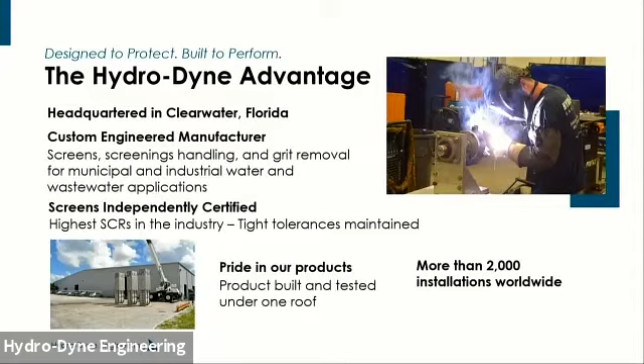First, who are we? We're Hydro-Dyne Engineering, headquartered in Clearwater, Florida. We're a custom engineered manufacturer of screens, screenings handling, and grit removal equipment for water and wastewater applications, and we've done municipal and industrial applications as well. Our screens are independently certified, and we have the highest screening capture ratios in the industry because we design and fabricate with very tight tolerances. We take a lot of pride in our products. Our products are built and tested under one roof, and we have more than 2,000 installations worldwide, so we have a large installed base.

A little summary of our presentation today. I've tuned this to maybe someone newer to the industry, but I wanted to talk about the Headworks first—it's a tough environment, a tough neighborhood. Then I wanted to transition to Headworks equipment and talk about best practices. Specifically, we're going to go into pickling and passivation and what that means. Then we'll talk about some material handling, cover some case studies, and then have a Q&A session.

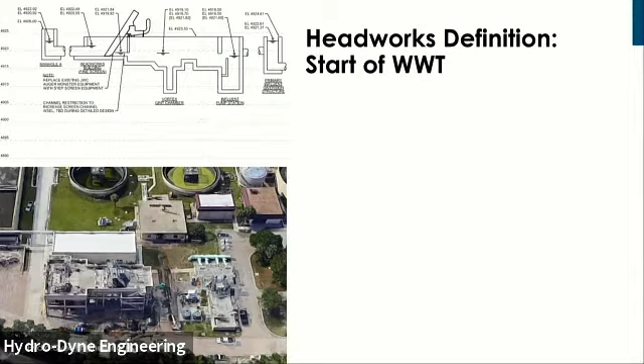So let's get started. The Headworks—it's the head, the start of the treatment process for wastewater. What does that mean? Typically, it's a concrete structure that's at the highest point of the system, and the Headworks contains the first unit processes: screens, screenings handling, or grit removal equipment. The purpose of the screens is to remove inorganic solids.

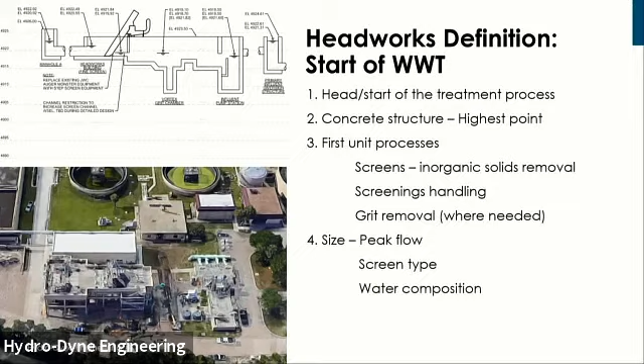The size of the Headworks is variable and depends on peak flow, screen types, and water compositions. I wanted to show a few pictures with this. The top picture shows a Headworks that is not elevated—you can see the screen there with a grit removal section and then a pumping section. Many Headworks are elevated; here's one at the bottom, very large, rated to about 20 MGD. In this case, the pumps lift water to a higher elevation to flow through the treatment process.

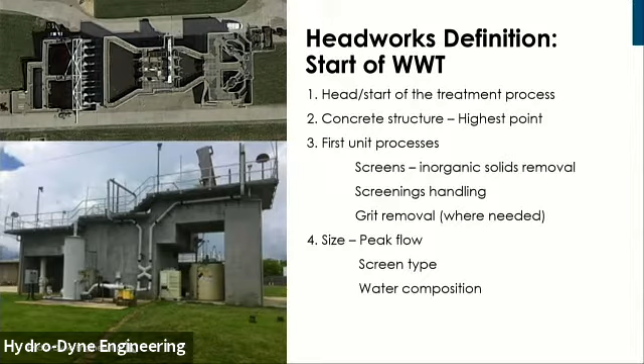Let's show you a couple more. The bottom picture here is a 1 MGD Headworks, a much smaller system, with the same design philosophy of screens and grit removal equipment, but elevated. The top picture is a larger system still, rated to somewhere around 40 MGD as peak, with very large equipment—large pumps, large screens, larger grit removal equipment—as needed to process those types of flows.

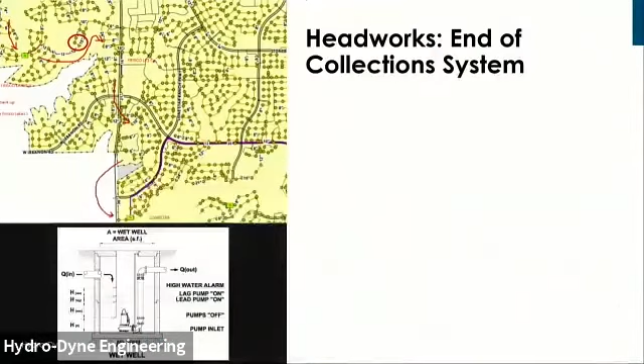The Headworks is also the end of the collection system. What is the collection system? It's a network of underground piping moving wastewater for treatment. Typically, a collection system is gravity or pumped wastewater, depending on the topography of the area. Most collection systems have some portion that is pumped—it's typically not all gravity. So you may ask, well, what does that mean?

That means a system can have many pump stations. A pump station typically has a couple of typical features—an underground tank with a submersible pump, some type of piping—and pump stations can vary depending on size. It's not uncommon in the flat Gulf Coast to have 3 or 4 pump stations that move water from the user to the treatment plant. The top picture here shows an underground network, and if we remove the soil, it can give you an idea of how large these networks can be.

That's a Texas city, by the way. If we think about one of our local cities, say St. Petersburg, Florida, St. Pete has 800 miles of gravity piping, 49 miles of force mains, and around 83 pump stations. That's a medium-sized city. If we go to a larger city, like Houston, Texas, they've listed 6,000 miles of total piping in their sewer collection network. So these systems can be quite large.

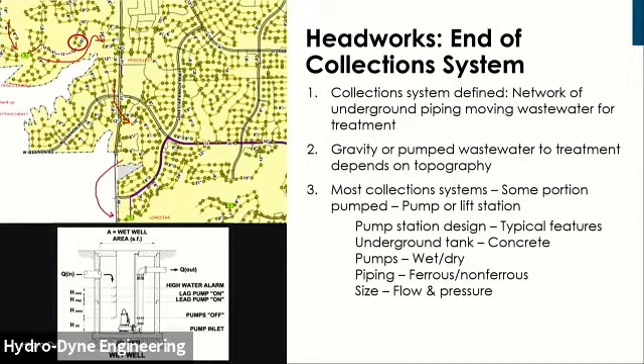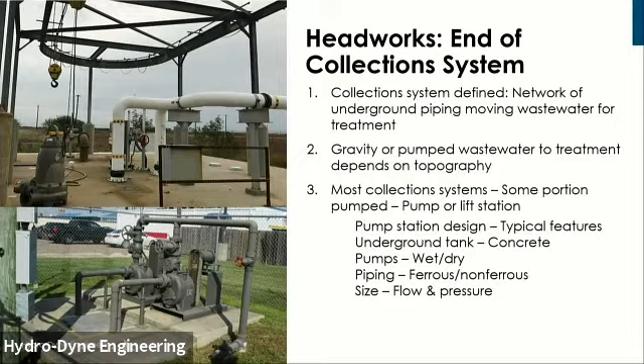The bottom picture again shows a typical design. I wanted to show a couple more designs here because they can vary greatly. The bottom picture shows a dry pump arrangement, a small pump station rated to about 50,000 gallons a day max. Bigger still is the top picture, where we have about 2 million gallons a day in that pump station, and you're looking at the top of the concrete tank with a submersible pump and davit crane to move the pumps around. And we can go bigger still.

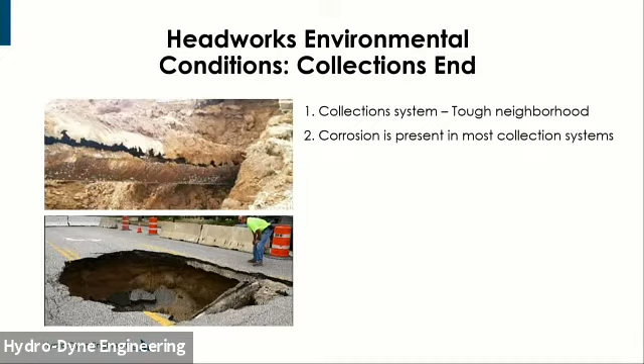Let's talk about the collection system a little bit more. The collection system is a tough neighborhood. You'll see the pictures here of corrosion as it shows up in the collection system.

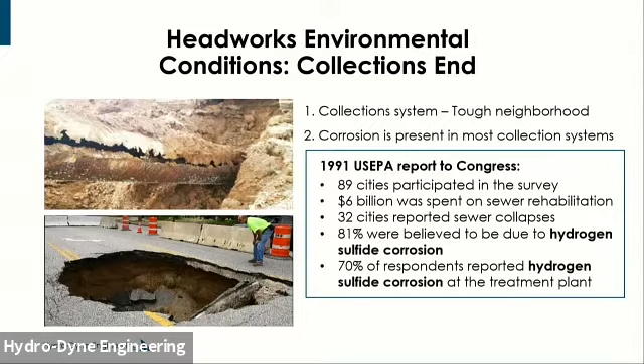In 1991, US EPA did a report to Congress. 89 cities participated in this survey. $6 billion was spent on sewer rehabilitation, and this is 30 years ago. 32 cities reported sewer collapses. 81% were believed due to hydrogen sulfide corrosion. And 70% of the respondents reported hydrogen sulfide corrosion at the treatment plant. So this is something that's pretty widespread.

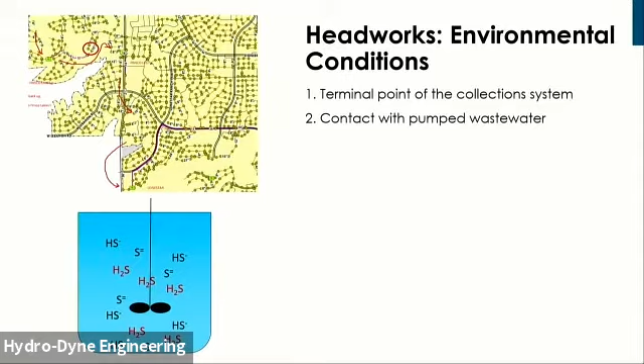And you may ask why. There are two sources that I wanted to talk about that directly impact Headworks equipment, and that is biogenic corrosion and corrosion driven by high chloride content. First, biogenic corrosion. We're going to go back to the collection system, and as the Headworks, we are the terminal point of a collection system. And you noticed I talked about pumped wastewater.

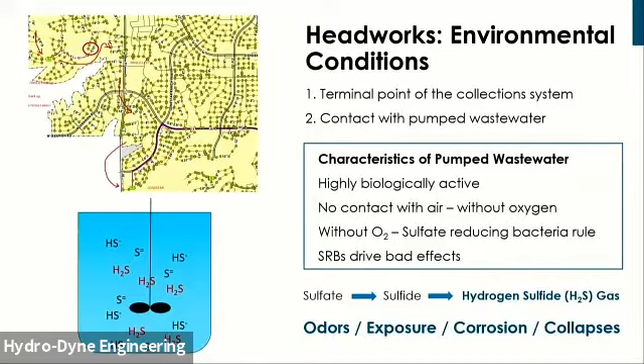Pumped wastewater is highly biologically active. It has no contact with air typically. So without oxygen, sulfate-reducing bacteria that reside in the system can take over. And the sulfate reducers can drive bad effects. They take the sulfate, they can then turn it into sulfide, and then turn that into hydrogen sulfide gas. Hydrogen sulfide gas is our problem child. That can cause odors. Exposure by humans can cause blindness and death in great amounts. It causes corrosion in the system and ultimately collapses.

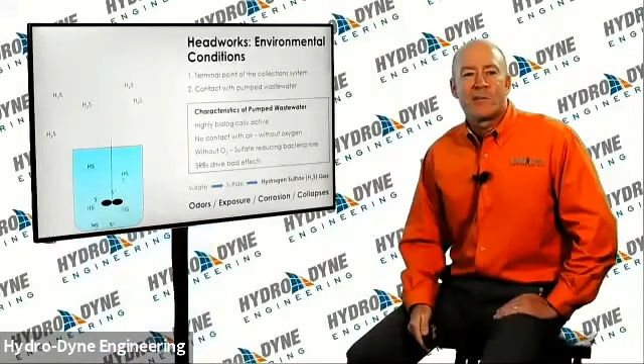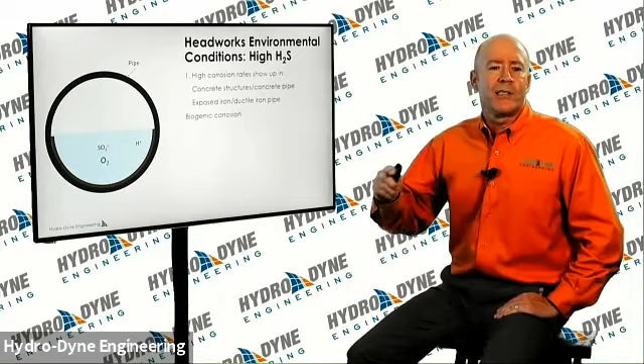We have a small graphic here. Hydrogen sulfide is a gas. It wouldn't be so bad if it stayed in the liquid, but it does not. It comes out of the liquid and manifests itself into the airspace. We have a graphic on that. So the high corrosion rates show up in concrete structures, concrete pipe, and exposed iron and ductile iron pipe as biogenic corrosion. It goes something like this.

Biogenic corrosion is driven by sulfur oxidizing bacteria. They take the H2S, hydrogen sulfide, as it occurs in the system. They react with air, and they can make sulfuric acid. Now we'll play the graphic. So oxygen is depleted. The sulfate is then converted to sulfide. That then can convert to hydrogen sulfide.

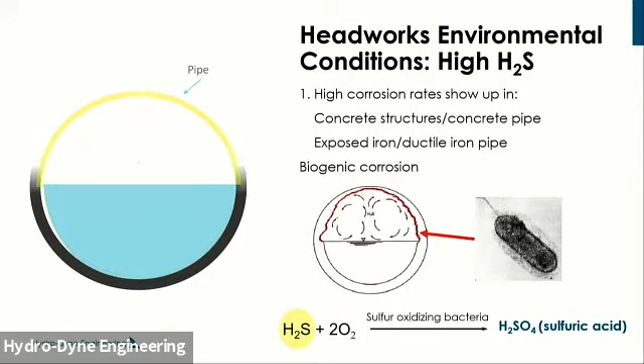And then as a gas, that can then come out of solution in the system with turbulence. And when it does that, the bacteria then can convert that to sulfuric acid. And the sulfuric acid is the real problem. That can then attack iron and concrete piping. And that's how we end up with a pipe that looks like that. And that all ends up at our Headworks.

The second type of corrosion that can happen in Headworks equipment is due to high chlorides. Chlorides come in mainly from seawater intrusion. Seawater has a total dissolved solids level of 35,000 parts. Its chloride levels can be greater than 19,000 parts. That can cause problems in the system at certain levels.

Water softening can also introduce high chlorides. In some areas with hard water, the softeners are regenerated with sodium chloride, and that can then be introduced to the wastewater system. It can also get in through road salt in the wintertime in northern locations, and it can be entrained in air in coastal facilities. Chlorides can also be introduced in the system by industrial blowdown, meaning cooling tower or boiler water.

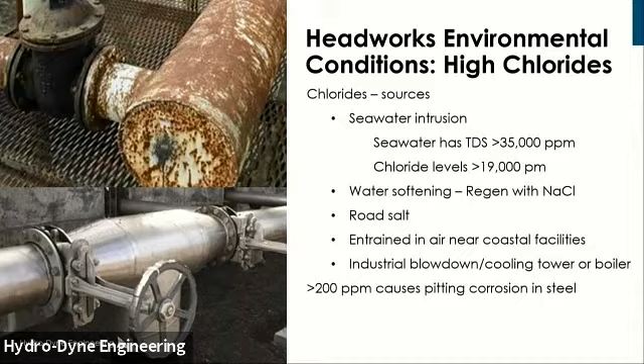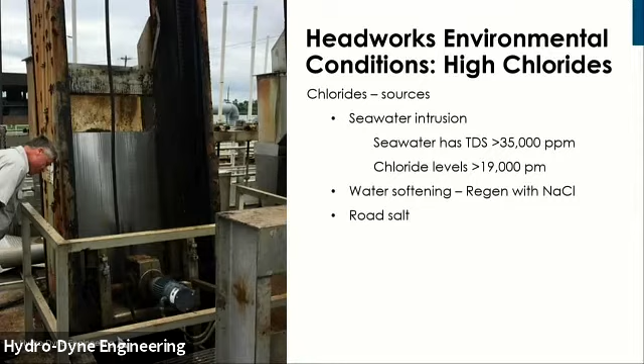Let's go back to the last slide. Here's a good example. It's not our screen, but you can see the pitting caused. This is a coastal screen, and we have pitting caused in the stainless steel by chlorides as they're entrained in air. And we don't want the rust on the screens.

Let's talk about requirements. For screening equipment, we need acid-resistant materials. We need materials that can withstand biogenic corrosion. We have to have chloride-resistant materials potentially, and materials with structural strength. They have to withstand hydraulic loading, potentially be very large sizes. So whatever material we pick has to hold up for a long time. We typically build equipment with a 20-year lifespan.

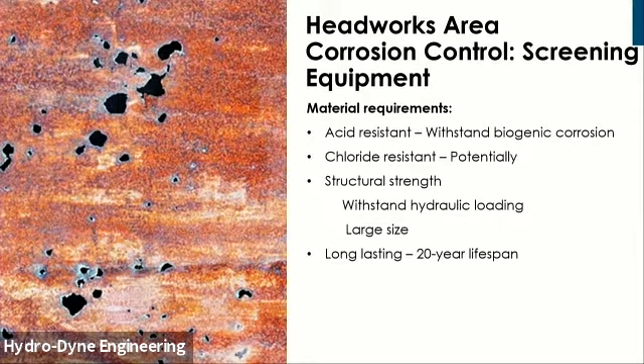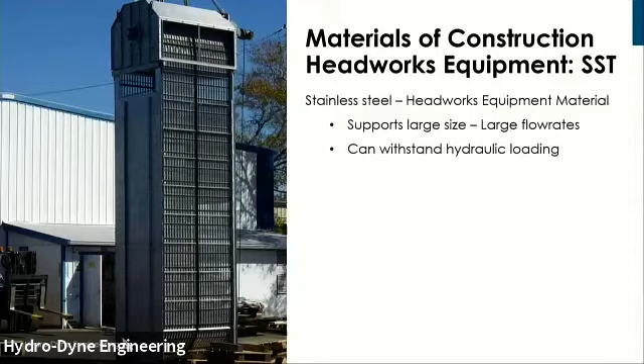It has to be affordable. So our materials of construction generally for headworks equipment is stainless steel. Stainless supports a large size and large flow rates. Stainless can withstand the hydraulic loading that can be put on the equipment. Stainless is acid resistant, and that means it's resistant to biogenic corrosion as that occurs around the headworks. It's resistant to chloride content to a certain extent.

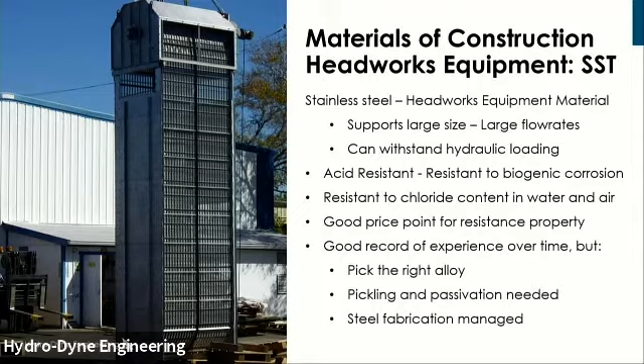Generally has a good price point and a good record over time, but there are a couple caveats. One must pick the right alloy for the right application. Pickling and passivation are needed in the stainless steel fabrication process, and the steel fabrication's got to be managed. We'll talk about that a little bit more. But let's talk about the alloys.

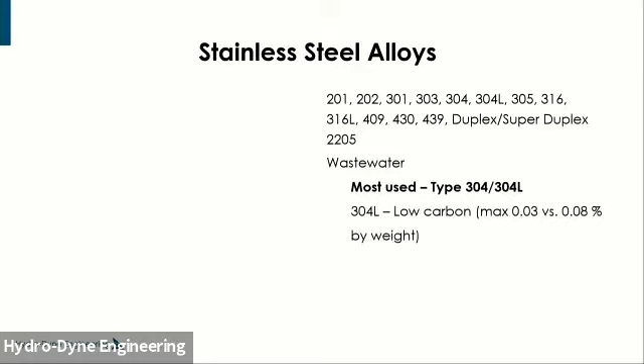There are many alloys for stainless steel. These are different recipes for the steel. The most used is type 304 and 304L. 304L is the same recipe as 304, it's just got low carbon in it. You can look at a recipe list here. 304 has chromium, nickel, manganese. 316 is another higher grade of 300 series stainless steel. It's got more nickel and molybdenum in it. In this case, we look at the chloride levels, and that drives material selection.

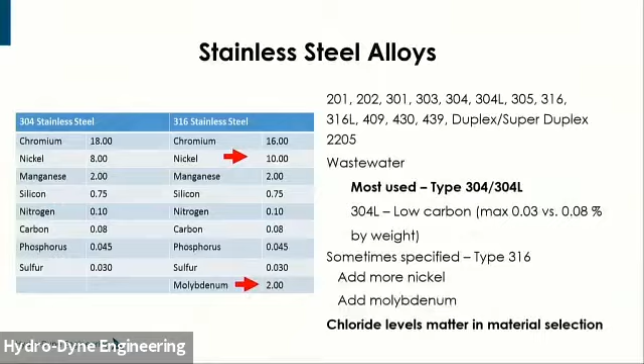Stainless steel goes back to the early 20th century. It was discovered in producing gun barrels, and it was determined that steel with a chromium content of greater than 10.5% stood up better over time to corrosion. Let's look at chloride levels. Chloride levels greater than 200 parts per million in the liquid will drive us to fabricate with 316 steel. Higher chlorides may drive other material selection.

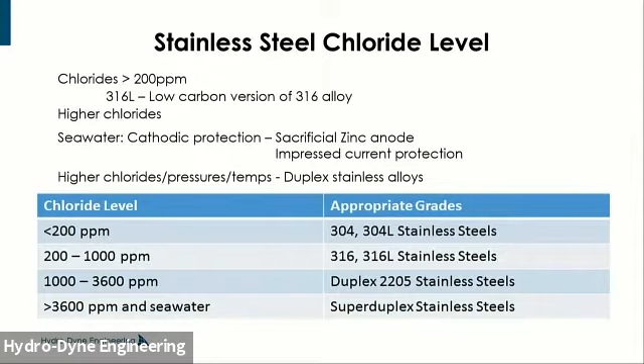If we go to seawater, we may do sacrificial zinc anodes and impressed current protection for equipment and kind of treat the equipment like a boat. For higher chlorides with high pressures and temperatures, say that would occur in pulp and paper applications or oil and gas applications, we would then go to duplex stainless alloys. That typically is not a material for a wastewater application. Let's zoom in on the screen a little further here.

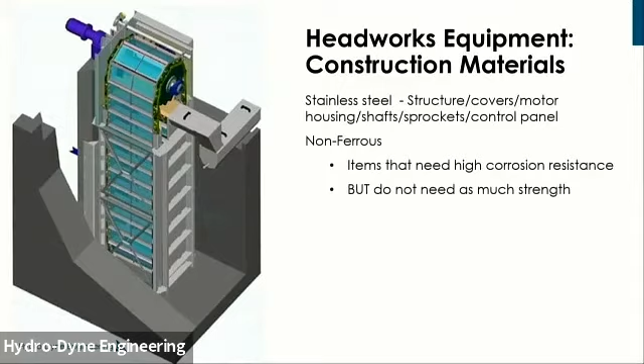So stainless steel is used for the structure, covers, motor housing, shafts, sprockets, and control panel. Say we see the structure, sprocket up top, any type of screening structure as it stands. But stainless steel is not the only material that we would use. Some items we don't need the strength, but we need high corrosion resistance, and we can use non-ferrous materials, and that would be ultra-high molecular weight polyethylene and acetal polymer. These don't corrode, they have high tensile strength, they have low coefficients of friction, meaning they'll move well through the water, and they're used in things like body armor, parachute cord, or biomaterials.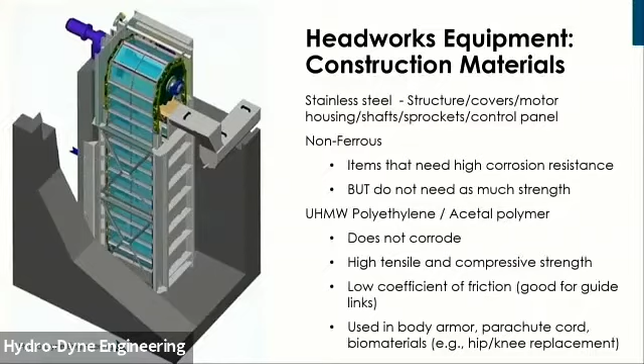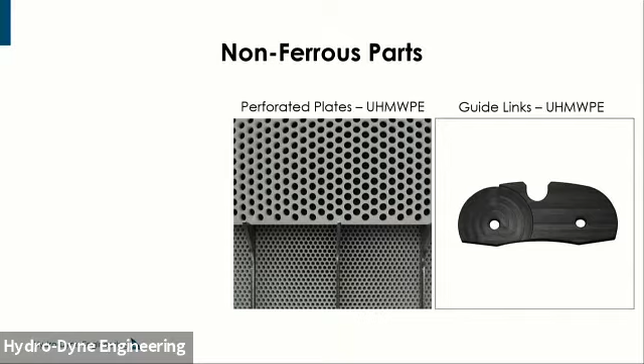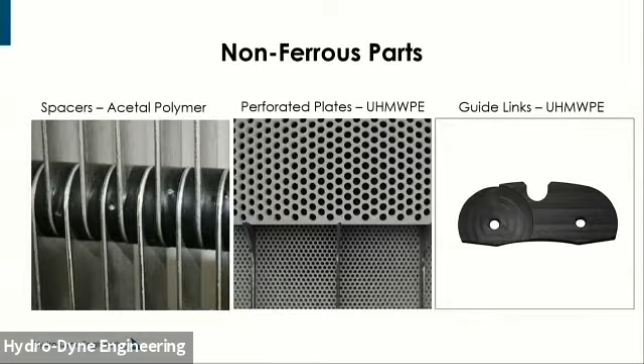So let's look at that a little further. We can use a perforated plate. We have one of those here, and a guide link. Here's a guide link that is machined out of ultra-high molecular weight polyethylene. We have a perforated plate. In this case, this is machined plate with 6mm openings that are used as a screening material. Then we also have spacers in that network that can be machined very precisely and allow the spacing that we design for the skid, for the screen.

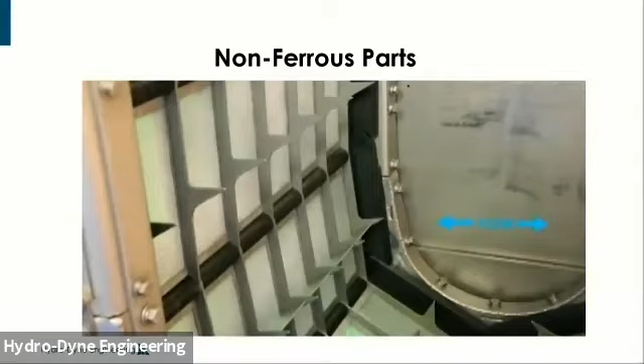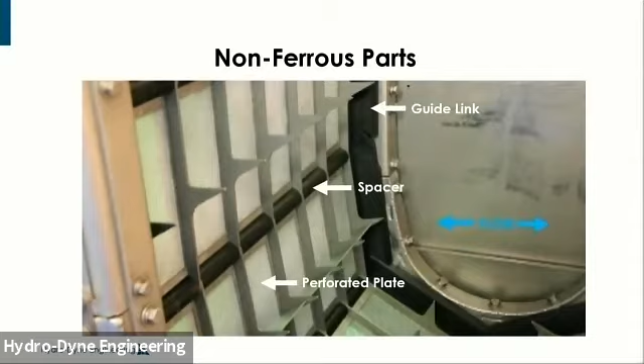Let's see how that all works together here. So we have a picture of one of our center flow screens. The flow comes in and goes out the screen. Then what we have is a guide link, the spacers in between lace link supports, and our perforated plate as the screening material to remove inorganic solids. It all works together seamlessly. Let's switch to more of the design.

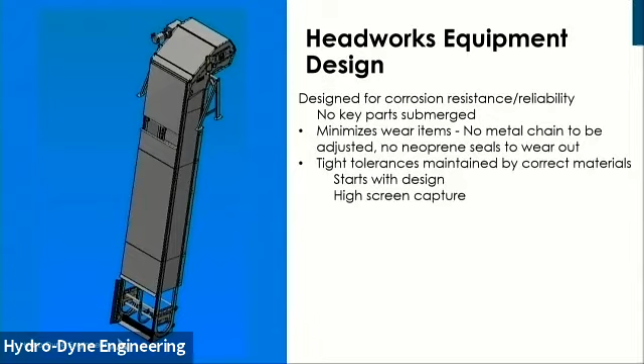So in this case, we're designing the entire unit for corrosion resistance and reliability. So we have no key parts that are submerged. We want to minimize our wear items in the design process, so we have no metal chain to be adjusted and no neoprene seals to wear out. We generally maintain tight tolerances, so that begins with our design process, and the tight tolerances allow us to have high screen captures. We use solid stainless steel drive sprockets,

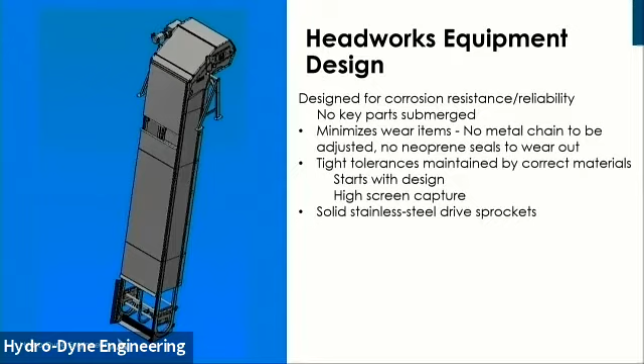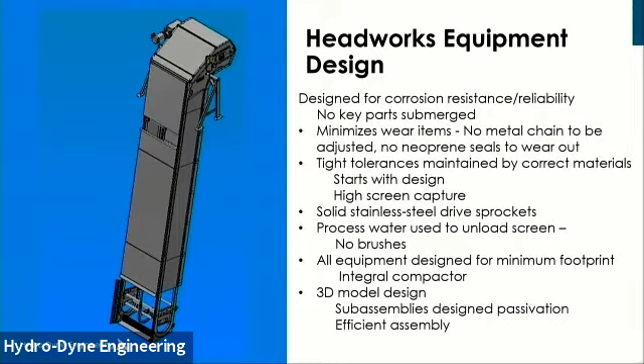And we 3D model the design. That allows us to get a good look at the sub-assemblies needed. All parts need to be pickled and passivated, and it allows us for efficient assembly. And we'll move to assembly here in fabrication next.

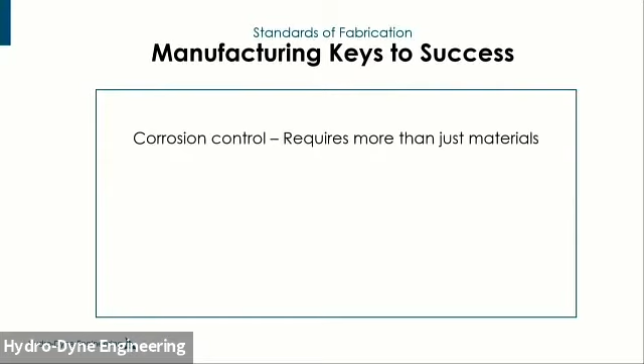Just picking the right material is not enough. We have to have controls and processes through our assembly process to make sure we have good corrosion control over time. So the fabrication methods are important. We surface treat the steel. We want to use the correct tools for fabrication and assembly. And our facility is ISO 9000 certified, and I want to talk about that a little bit further on a future slide. But ISO 9000 is a quality program driving formal written procedures for key processes.

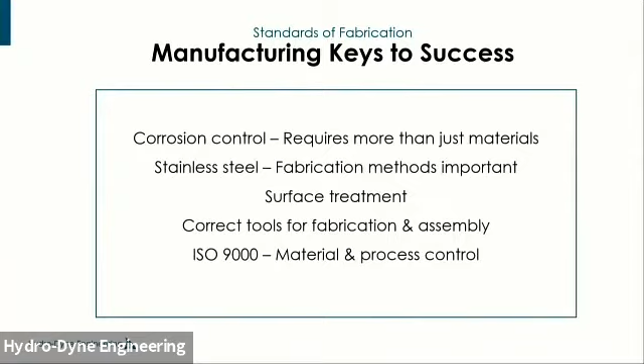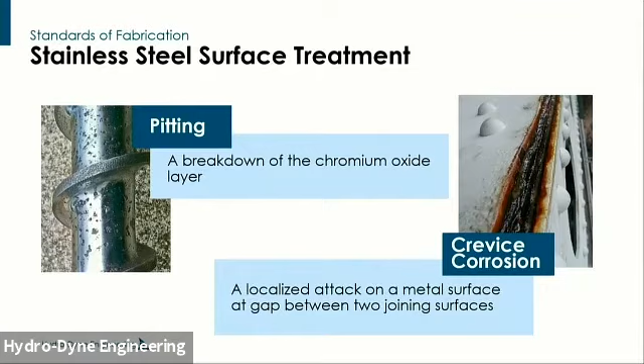Let's talk about surface treatment. Pitting is a breakdown of the chromium oxide layer in a steel. This can ultimately lead to failure, material failure in the steel, so it's not a desired property. We can also get crevice corrosion, that's localized attack on a metal surface at a gap. That can also lead to failure in a structure, so we really want to avoid these processes. How do we do that?

So for all the stainless steel for the screens produced, we pickle the steel. And pickling is a metal surface treatment used to remove impurities. We remove the iron from the surface of the steel. You may ask, how do we do it? We use strong acid contact. So we use hydrofluoric acid, and that removes the embedded iron in the surface. And here you can see the dark scale formed during the welding process. That discoloration is a low chromium area, and that's a potential corrosion point over time.

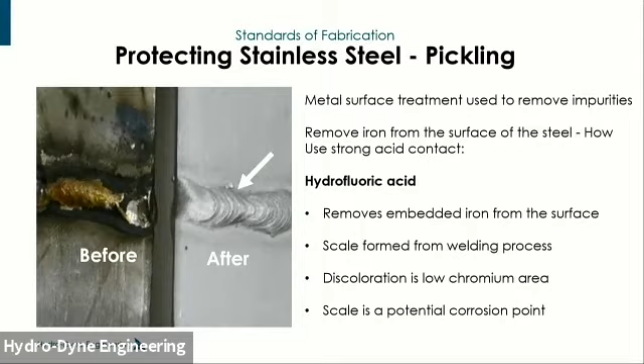After contact with hydrofluoric acid, we get a very clean surface, which then we can use on the next process for surface treatment, which is passivation. So we passivate all the steel. This assists in the formation of a chromium oxide layer that protects the surface. So we use strong acid contact for that as well with nitric acid. So that's used to accelerate the oxidation of the surface layer of the steel.

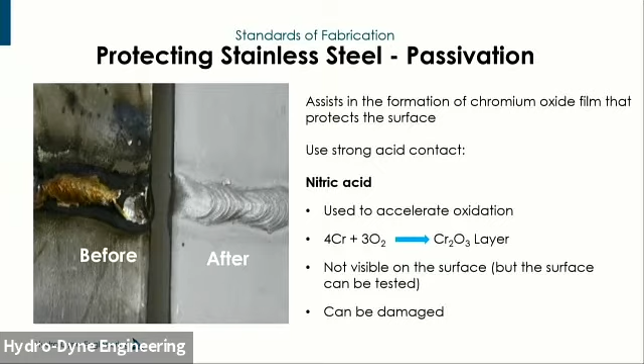It's not visible on the surface, but we can test to make sure it's there. The oxidation layer is nanometers thick, and it can be damaged. So after we take the time to clean the steel and passivate it, we have to be very careful that we don't damage the surface.

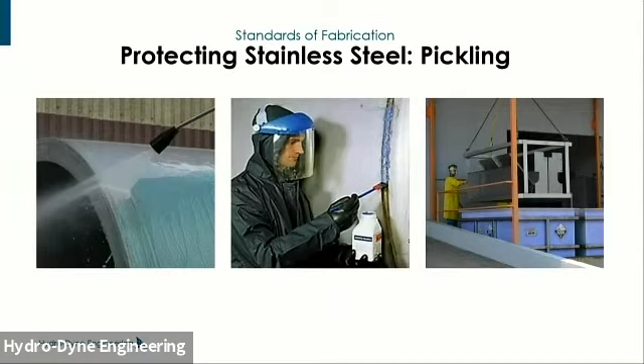Let's talk about the pickling and passivation process a little bit further. There are 3 methods that can be used. We can spray apply the acid to the surface of the steel. We don't really like that. It's not very precise. The operators have to wear PPE. They're exposed to acid. We can apply a pickling paste or gel. Again, this is not very precise.

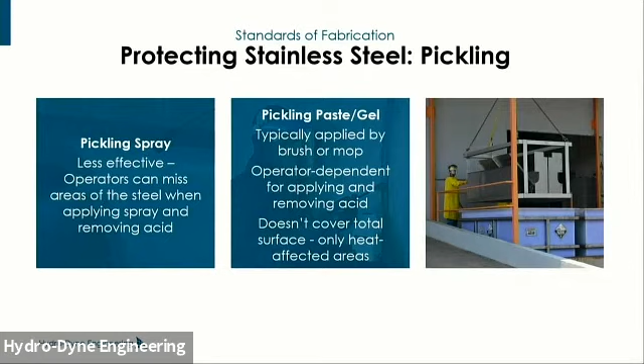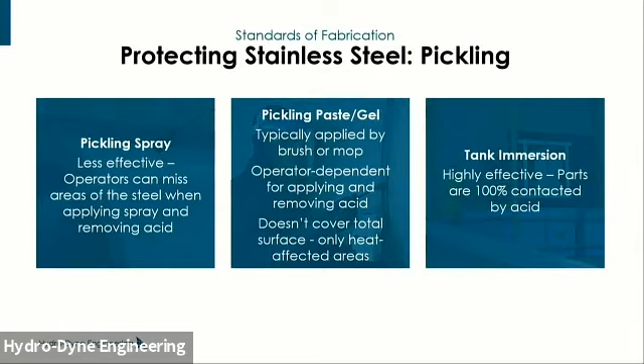It's not as repeatable. The third method is tank immersion, which is the picture here, which shows assemblies being put into our acid tank. That's the one we use. It's highly effective. All the parts are contacted, so we can make sure we have a good, clean steel with a good oxide layer laying on it. Let's talk about that a little bit further.

So the pickling and passivation process used by Hydro-Dyne is a 4-tank process. We pre-clean the steel with a tank 1 immersion. We rinse the cleaning residue in tank 2. Then we descale and passivate in a 3rd tank, and that's where we have nitric and hydrofluoric acid contact. We don't use mechanical processes there. We don't believe they're as precise and deliver the results. Tank 4, we remove the residual acid, and then we dry every piece. So every item is pickled and passivated: cover, structure, piping, anything that is attached to the screen.

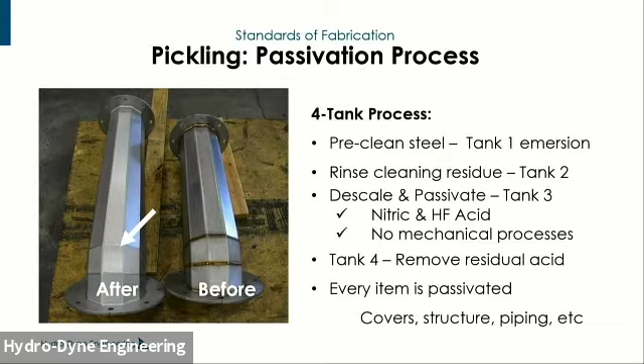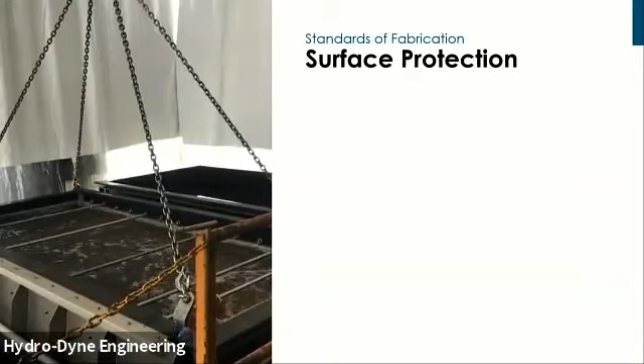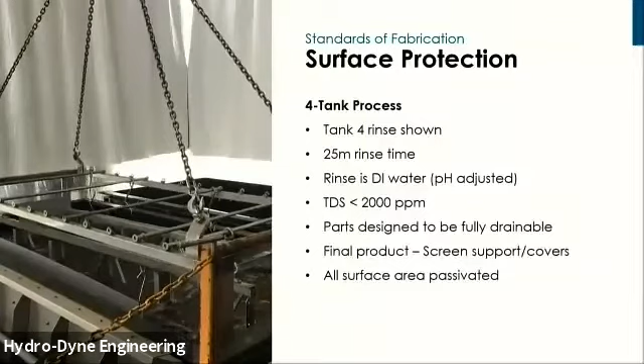You can see the results here. Before pickling and passivation, we have a dark weld scale. Everything cleans up, and we have a nice, clean, passivated surface after the process is complete. Let's show that a little bit. So in this case, we have our tank 4 rinse. And this is equipment coming out of our rinse tank. It's generally a 25-minute rinse time, and we rinse with DI water. You can see that all the parts need to be fully drainable, so we can't have liquid hanging up on any part of the screen.

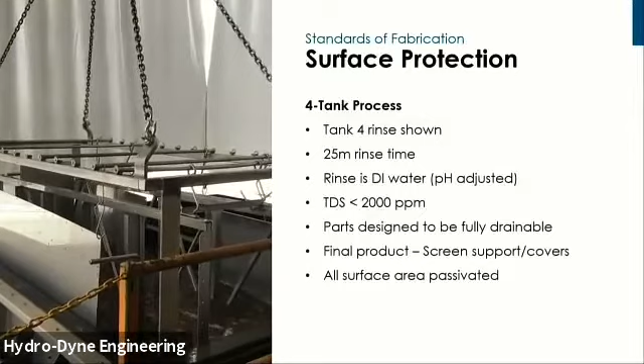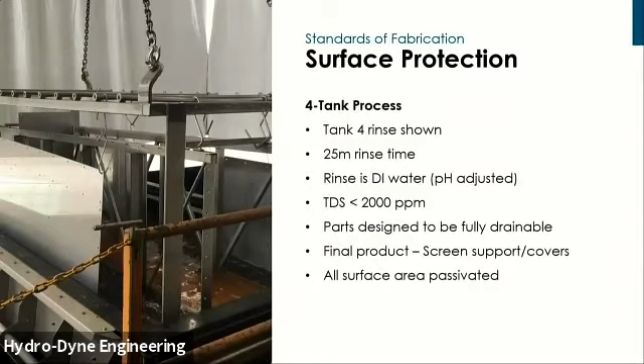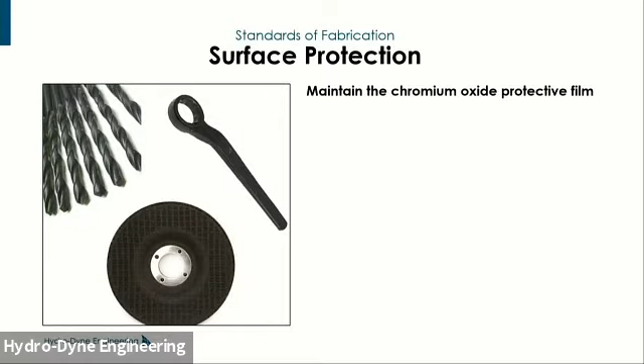And in here, we've got the final product as screen support and covers that are coming out of our rinse tank. So the entire surface area is cleaned and passivated, and ultimately corrosion protected. So we've taken all that time to pickle and passivate the steel and dry it. So then when we fabricate further, we want to make sure that we protect that passivation layer.

So that means we don't want metal-to-metal contact with dissimilar metals. We really don't want to be scraping or brushing on the steel to interfere with the passivated layer. And we have to use the right tools for assembly. So if we have to hammer on the steel, we would use something like a rubber-coated hammer. And ultimately, we really want to eliminate grinding, welding, cutting after the passivation layer is applied. If the wrong tool is just laying on the surface, that can damage the passivation layer and show up as a rust stain later. So we really have to take the time to fabricate correctly so that that doesn't happen.

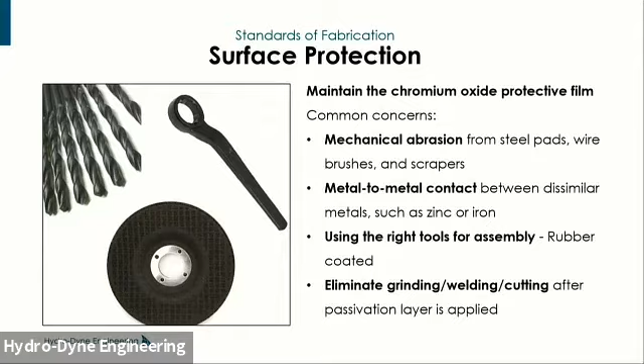We have a quality assurance process through our fabrication and passivation process. Our tanks are monitored. We measure the content of the sludge. We make sure we have the adequate content of acid, and we adjust that if necessary. We recycle the water where we can.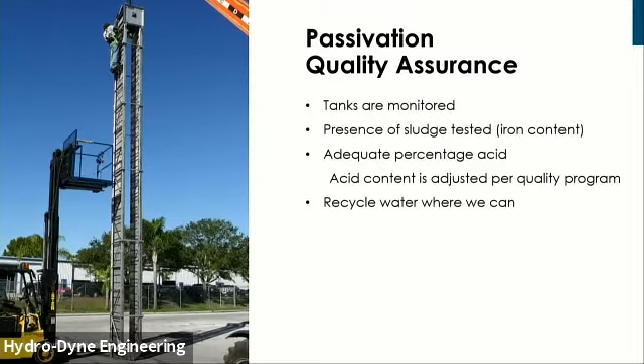And ultimately, we didn't come up with this. We're following ASTM guidelines, which are available to the public. That's standard A380 and standard spec A967. These contain generic instructions for how to correctly pickle and passivate steel. We've taken that and further refined it into our quality operating procedure, and that's part of our ISO 9001 process.

Let's talk about ISO for a second. ISO 9001, we are certified in this area. ISO 9001 is a division of the ISO 9000 umbrella. It's specifically for design and production facilities. So our key processes are formally documented as part of ISO. That means we don't get the 304 and the 316 messed up. We make sure we put the right material in the right places.

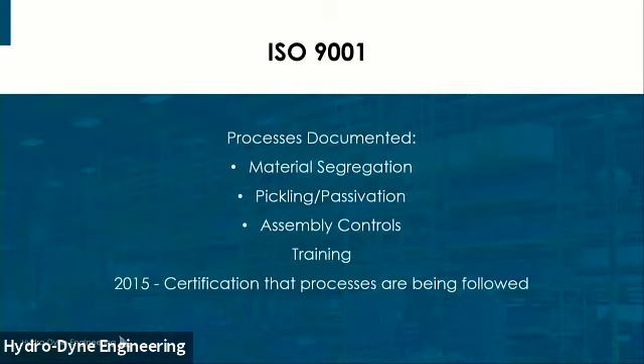We have formally documented the pickling and passivation process so that it's controlled and done correctly. We have assembly controls so that our fabricators understand what tools to use in what area. That helps us train people and make sure that the screens are fabricated correctly. And again, in 2015, we were certified against our own procedures.

So let's move to a couple highlights here, and then we'll wrap it up. First project highlight is a job we did in Maryland. There were 3 screens, and these were the tallest screens produced, rated to 20 million gallons per day as peak flow. We put these in a 45-foot deep channel, so they're 56-foot tall screens. They're stainless laced link design. In this case, we also included screw conveyors.

But as you can see, the screens are tall. They would not fit in the pickling tank. So the screen design has to accommodate that. We have to design in sections, fabricate in sections that can be then pickled and assembled correctly and then tested and shipped as appropriate.

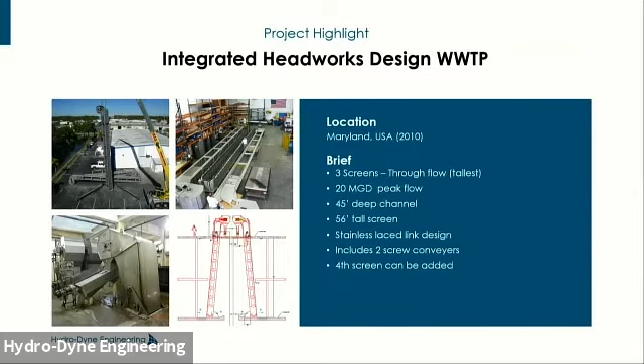The second highlight is a job we did in Australia. In this case, we had several screens. These were seawater intake screens rated to 53 million gallons per day, so they're very large screens. We did a through-flow lace link design and a mesh design for the first set. That's the screen on the right here.

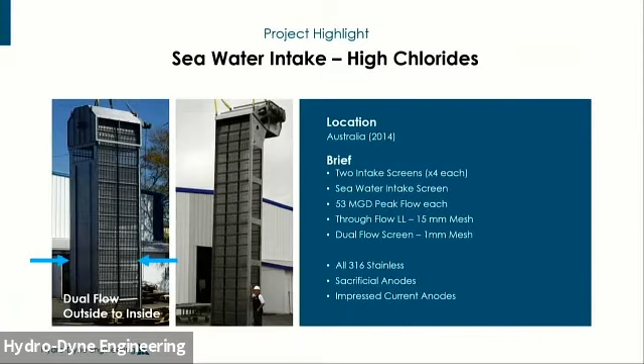The second set, we did a dual flow design, and a dual flow design is where water comes from the outside to the center. These screens were built in 316 stainless with sacrificial anodes and impressed current anodes. So we kind of treated them like the hull of a boat.

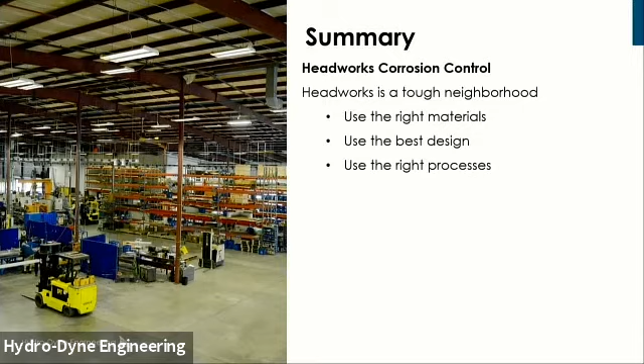So let's wrap it up and then we'll take some questions. So in summary, for Headworks equipment corrosion control, the Headworks is a tough neighborhood. We can have very high hydrogen sulfide, high chloride, so we have to use the right materials. We also have to use the best design to make sure those materials fit together and work well together. Then we have to use the right processes so that once we lay down the passivation layer, that is not damaged through the fab, shipping, and test processes.

So a couple other things that I wanted to add: when choosing a supplier, select a supplier that understands that environment and understands the sensitivity of the corrosion that can happen in the Headworks environment. Ask the supplier for a corrosion control plan. Ask about the processes. We would advocate that you select a supplier with 100% in-house so that there is 100%

control of each process, and to make sure that once that passivation layer is laid down, that the steel is then fabricated correctly. ISO certification is also something we would advocate. That's helped to make sure that the processes are formalized and then followed. And please visit the factory. We would always recommend and encourage anyone to do that here.